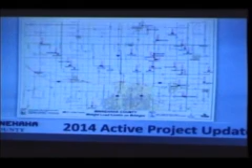That's the 2014 project map, showing all the different projects. The green circles are bridge replacements we're currently working on. The pink circles are bridge rehab projects we're currently working on. The purple lines are the microsurfacing project, the yellow lines are the chip seal project, and the green lines are the overlay project. So we have a lot of work this year that we're going to try to get done, as much as we can within our personnel constraints and budget restraints.

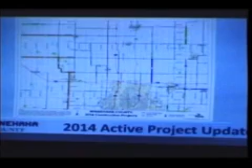I've put together a priority listing of our active projects. I hope you don't get too focused on the priority rating, because our priorities change quite a bit depending on different things that happen during the project. One good example is the permitting process. We have a lot of hang-ups with the Army Corps of Engineers, which can really change the priority of a project when we find out it will be delayed for 6 months.

Priority number one is the two bridge replacements left on Arrows Road, County Highway 121. We've already awarded that contract and had a pre-construction meeting. Prom Construction is the contractor. The project cost is just over $1 million for the two bridges, located just south of the two bridges we replaced last year. They plan on starting in early April.

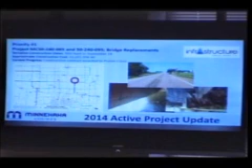Priority number two is our asphalt microsurfacing project. You'll be authorizing the contract for that later today, hopefully. We received excellent bids at $404,000 for the low bid, compared to our estimate of just over $700,000. We've been working closely with contractors, the City of Sioux Falls, and a couple local consultants to make these projects come together. This year we have 8.9 miles of microsurfacing, and we're really excited about it.

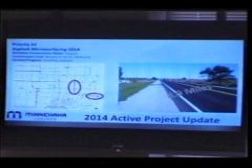We did the design in-house and will be doing in-house construction administration for this project. We originally planned to go with the City of Sioux Falls on their bid along with a couple other municipalities, but we ended up pulling out at the last minute. The bids we're hopefully awarding today were significantly cheaper than the unit prices on the City of Sioux Falls contract.

Priority number three is the low slump overlay project on a bridge just southwest of Garretson. We've already awarded that to PCI Roads at a cost of $221,000. It's a 255-foot structure where we're doing a deck rehab with the low slump overlay. They hope to start construction there next month.

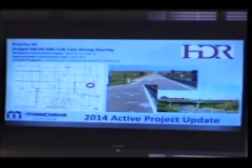Project number four is in the northeast part of Dell Rapids, right by the school we've been talking about with the school district. We have a construction contract awarded to Dakota Contracting out of Sioux Falls for $361,000, and they're hoping to begin in June, right after school gets out.

The chip seal project is our priority number five. We want to do almost 42 miles of chip seal this year, and we're expecting that contract price to be just over $900,000. We have a bid opening for that tomorrow. We also do this project in-house, both putting the plans together and observing construction.

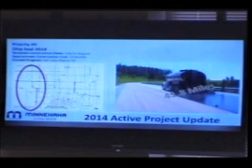Priority number six is our asphalt overlay, broken up into three different areas of the county. The northeast and southeast parts of the county are both contracted work, while the northwest part will be our own crew putting a mainline overlay on a few miles of roadway up there. The approximate cost is about $1.5 million, and that's another contract we'll be opening bids on tomorrow.

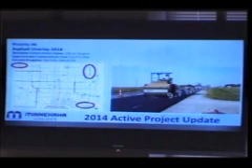Priority number seven covers two structure replacements designed by IDG. We've discussed this contract the last couple of weeks between the commission, the consultant, and the township out there. We expect the total cost to be around $675,000 for the two bridges to be replaced. One is currently a 38-foot bridge, and the other is a 62-foot bridge, and we're looking forward to getting those replaced.

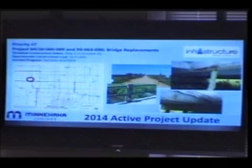Priority number eight is a bridge replacement on a county highway that is functionally obsolete. It's a narrow bridge on a corridor with a lot of trucking, especially coming from Minnesota, and we have a lot of contractors who need to be rerouted when they come from that part of the county because they can't cross this bridge.

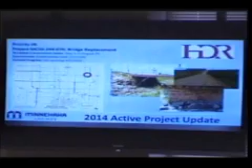Actually, I'm looking at the wrong one—sorry, that's on a township road. The one we just asked for permission to advertise is the project I meant. The approximate construction cost for that is $370,000. HDR Engineering did the design, and as I told Commissioner Kelly, it's a unique design with a three-sided structure, basically a box culvert without a base.

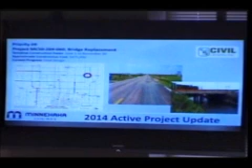Project number 9 is the bridge I was referencing previously. It's a functionally obsolete structure on our county highway system. It's also posted, which creates a headache for contractors and moving companies traveling east to west or west to east throughout our county. They want to use that road as a corridor but can't without zigzagging north and south around the county. The approximate cost is $475,000, and we're proposing a 50-foot single-span bridge to replace it.

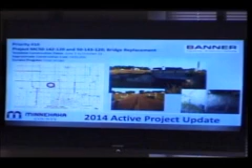Priority number 10 is a set of structures right now—one is a bridge, one is a box culvert, immediately adjacent to one another. Our plan is to remove both structures and replace them with a single box culvert. The approximate cost is around $400,000, and we hope to start this construction project later summer. This is one of the projects that's probably delayed right now because of some permitting issues.

Project number 11 is a structural rehab project for a structure on the northeast corner of Brandon, right at the edge of city limits on a township road. It's a pretty long structure at 285 feet and it's showing its age. We want to take care of it before it eventually gets annexed into the city of Brandon. We don't want another issue like we had last year with the city of Sioux Falls, where they annexed a bridge and ended up having to replace it that same year. So we're doing our due diligence by rehabbing the structure, repairing some structural items, replacing the joints, and upgrading the guardrail.

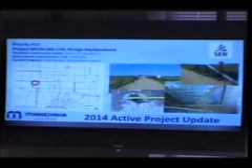Priority number 12 is a structure that we have SEH working on right now. This one is also currently being delayed, I believe because of permitting issues. We've received 60% plans and are going through the plan review process, and the plans are also in Omaha with the Army Corps of Engineers. We had initially wanted to start this construction project in May, but that's going to have to be delayed.

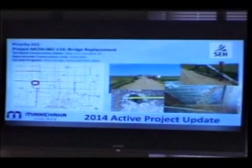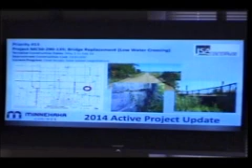Next is project number 13. We have a bridge replacement on a township road just east of Highway 11 and north of Brandon, and we're doing a low water crossing to replace a small structure. The approximate cost is just over $100,000, and we are not replacing the bridge—like I said, a low water crossing. With a low water crossing, you lower the road as it is today and allow overflow water to go over the roadway, with signage to warn travelers in advance so they know not to go there during high water flow. There are three 36-inch pipes under the road near the low water crossing that allow the normal daily nuisance water to travel under the roadway without impacting traffic.

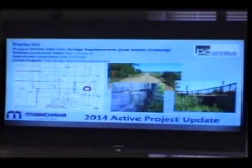This roadway has an extremely small amount of traffic. The traffic estimates we have from the DOT are very, very small—I'm not going to cite a number, but they are very small. There's another structure just north of this that, when it comes time, we'll probably look at closing rather than replacing.

On the point about traffic counts, we did receive our traffic counter in the mail last week, so moving forward we're going to not only have our estimated DOT traffic counts in our briefing memos, but actual counts as well for the commission to consider.

Some other notable projects currently under construction with Swing In Construction and the Department of Transportation include our Spook River Bridge project just southeast of Brandon, which started last fall. The total project cost is $719,000, and as you've heard before with your approvals on this project, we pay 20% of the participating costs, around $520,000, so our obligation is just over $100,000.

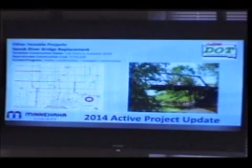Another project of interest is La Mesa Avenue, just north of Sioux Falls. Long story short, now is not the time. We will be giving the commission a presentation or a discussion on this here in the next few weeks.

La Mesa Avenue was intended to be turned over to the township several decades ago, and that action was never completed. The township has been taking care of this section of roadway for quite some time, and we found out recently that it was never officially turned over to them.

Coincidentally, it's in need of an upgrade to an asphalt section with the installation of the Sioux Falls Middle School on Madison Street. Being that it's a township or county road, we'll probably look at doing a surfacing improvement project on this section at a cost of about $200,000 sometime this summer. We're going to give a briefing to the commission in the next couple of weeks to discuss that more in depth.

This is a summary of the projects I just went over. The projects listed toward the top with a darker shade have been awarded or are under construction, with money already allocated. The projects in the center with lighter shading are somewhere in the process of advertising or going to be advertised, but haven't been awarded a contract yet. The projects on the bottom with no shading are currently active—maybe in design, or design is complete, but they haven't been advertised yet.

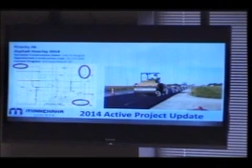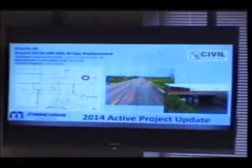On priority number 9, the bridge replacement, you talked a little bit about it. On the others it shows close-up pictures of the bridge, and this one doesn't have any, but it sounded to me like it was more of a width restriction issue than an inconvenience to some of the people who might be using it for commercial activity, like movers. Is that bridge a safety issue?

The biggest concern for me at this time is the operational side, the width of it. It does have a federal sufficiency rating of 39, so it is structurally deficient. The deficiencies with the structure are not critical, such that it's going to fall over or anything like that, but it's degrading fast and it's in poor shape. Rather than do a rehab on this project, since it's a narrow structure, the answer is to do a replacement.

So does that rating move it up further into the list compared to some of the other projects you're looking at? When you use the 39 rating, I don't know that we've seen ratings on the other safety issues. It's a relatively low rating compared to most of the other ones. The thing that moves this up in priority is that it's on a posted bridge on our county highway system, and we prioritize those more importantly than a structure on a township road system because of the level of traffic on it. I guess I understand that piece of it.

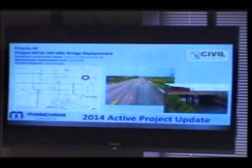Is it possible to get the safety ratings on the other projects you're looking at that are obviously bridge-related issues? The first thing we do when we consider any of these projects is consider a rehab, and we would prefer not to do a replacement because they're significantly more expensive. Some of them, I noted 2 of them here today, we are doing rehabs on those structures.

The rest of them that I've noted that are replacement structures, we've already evaluated, and it's not feasible to do a rehab project on those. There are other bridges that I haven't discussed here that our own maintenance crews are doing rehab projects on. A lot of the maintenance stuff we try to do in-house if possible, because those are contracts that are very difficult to bid and have a contractor do.

On the school issue, on La Mesa, when's that school supposed to be constructed and completed for occupancy? That's not that far down the road, correct? The middle school will be occupied this fall. Classes will be in session this fall. I haven't received a recent update, but my understanding is that they're immediately going to start construction, if they haven't already, on an elementary school, which will be in operation probably next year or the year after.

Any conversations with the city about that being part of the city limits versus the county's responsibility? Yes, we've had several conversations and coordination meetings on that stretch of road, both Madison Street and La Mesa. They do intend on annexing La Mesa in the long term, probably 10 to 15 years. So the improvement for $200,000 that I suggested earlier is basically a 10-year improvement that would allow us to not have to go out there and maintain gravel on a highly traveled road on a regular basis. But it's not going to last 20, 25 years. That's a 10-year project. We tried to get the city to participate in the project, and simply they're not interested. They are helping with some of their planning efforts, coordination efforts, traffic analysis, and pavement analysis, but financially towards the construction, they're not interested in helping out, and I understand.

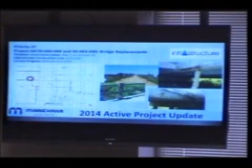The story I've heard, and part of it is true, is that there's a lot of concrete structures from that era, around 1970, that have deteriorated extremely fast. Most of them are a double-T structure, similar to those we went under on Highway 121 that day. I've heard it's a concrete issue. There are also some design flaws in that type of structure that have critical weak points causing certain pieces to break apart, like you can see in some of those pictures. It's something we see on a vast majority of our structures from that era, and it's not just this county. SDSU is working on a research project right now to try to find a replacement section instead of these concrete double-Ts. These are really cheap bridges to build, so we built a lot of them, and a lot of counties built a lot of them. SDSU is trying to find an alternative that is also inexpensive but doesn't have those critical weak points.

So I think it's probably a combination of the critical weak points and the concrete that was used in the 1970s, based off of what people have told me.

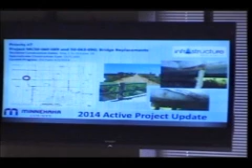Commissioner Kelly: The other day we discussed, you said there's some new trucking regulations coming that'll require load limit postings on almost everything. Are you in a position to brief us a little on what's going on there?

A little bit, and it's not almost everything. But there's a new load rating that the federal government has come out with, and they've sent us a memo that briefs government agencies on it. It's called an SHV load rating — imagine some of the trucks you may have seen around that are pretty short but have a whole bunch of axles. It allows a small truck to carry a really heavy load.

Those types of trucks are a new design vehicle that most structures, even just in the last couple years, haven't been designed for. The concentrated loads created by that type of vehicle, when they go over a short bridge, can often exceed the load rating the structure was never really designed for. So every one of our bridges is going to have to be looked at and analyzed for this load rating, and if they don't have the capacity, they're going to have to be posted. So it's very feasible that a bridge even under construction today could be posted within the next couple of years.

The briefing memo we got doesn't speak to this, but from what I've heard talking to our contacts in Pierre who work for the FHWA, there's probably going to be a phasing plan — they won't phase the load limit in all at once, like next January, so everything has to be posted then. Instead, maybe over the next few years, possibly several, that load rating is going to be phased in.